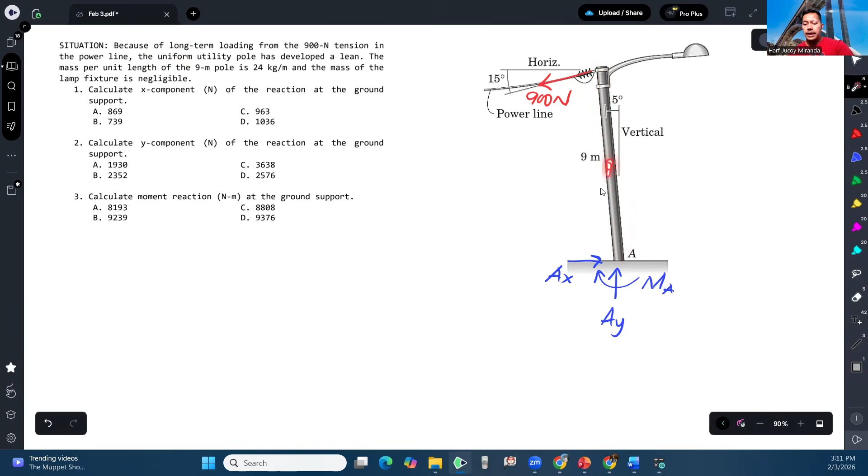Uniform naman. So that means the location of the weight or the mass is at the center, at its centroid. So let's say this is the center - so the weight of the pole acts there.

So how do we compute the weight of the pole? What was given to us is 24 kilogram per meter. So if this is the pole, what was given is the uniform weight per unit length. So this is 24 kilogram per meter. To get the weight of the pole, we just get the area of this.

And what is that area? The area is just base times height. The base is the 9, and the height is the 24. So 24 times 9, and that gives us - this is in kilogram still, since that's just mass - 24 times 9 equals 216 kilogram.

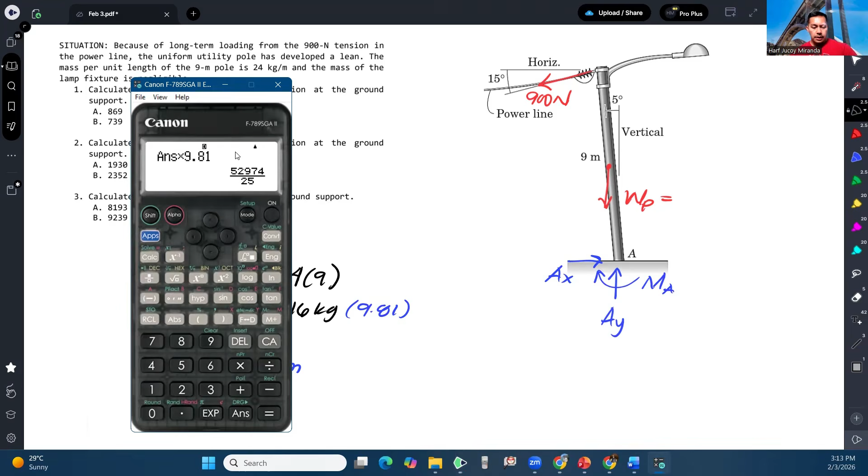But what we want is for this to be in Newton, so to convert it to Newton, we multiply by the acceleration due to gravity. Therefore, the weight of the pole would be 2118.96 Newton.

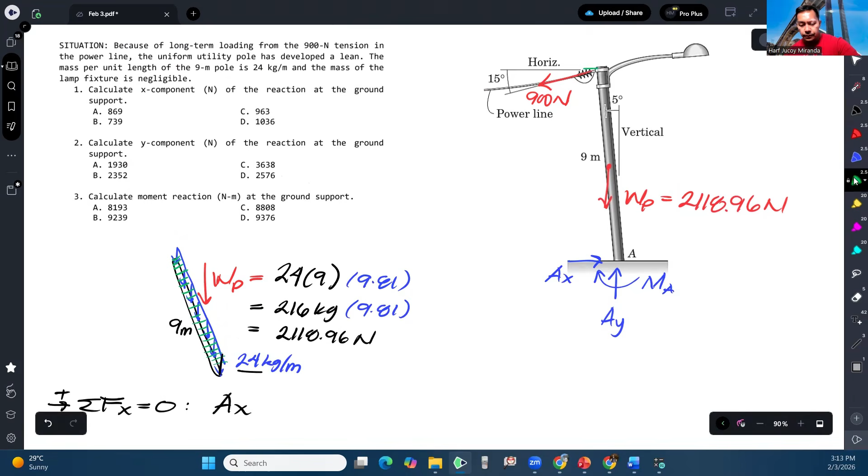Now, to find the x component, we will take summation of forces in x, assuming to the right is positive. So we have Ax. What other x components are there? The x component of the tension force.

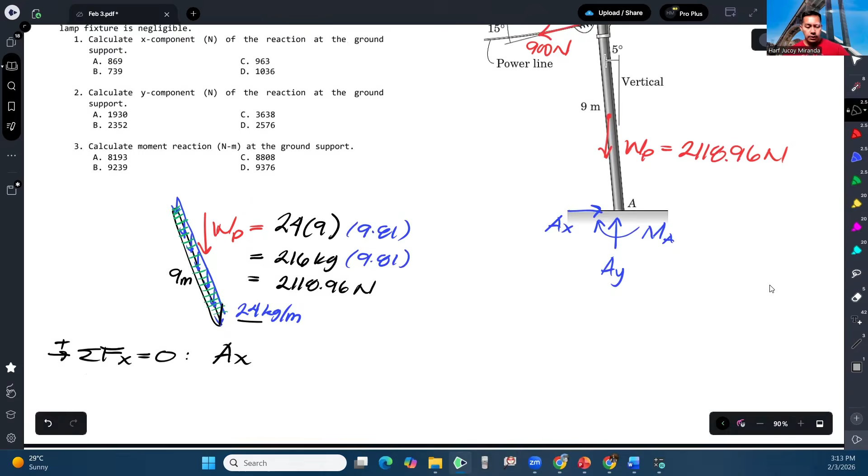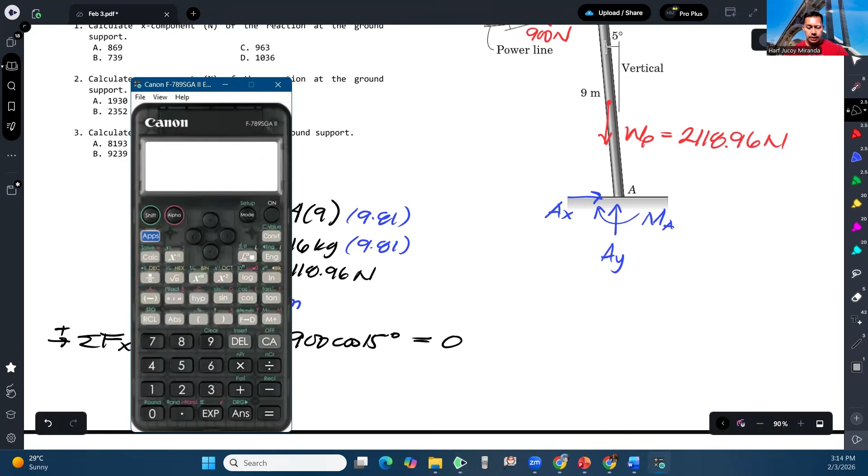So what is the x component of that? Since there's 15 degrees there, that is 900 cosine of 15, because the adjacent side is the x component, so that is 900 cosine of 15 to the left. Aside from that, wala na. So therefore we can already calculate the x component: 869.33 newtons. And that is already our answer for the first question, letter A.

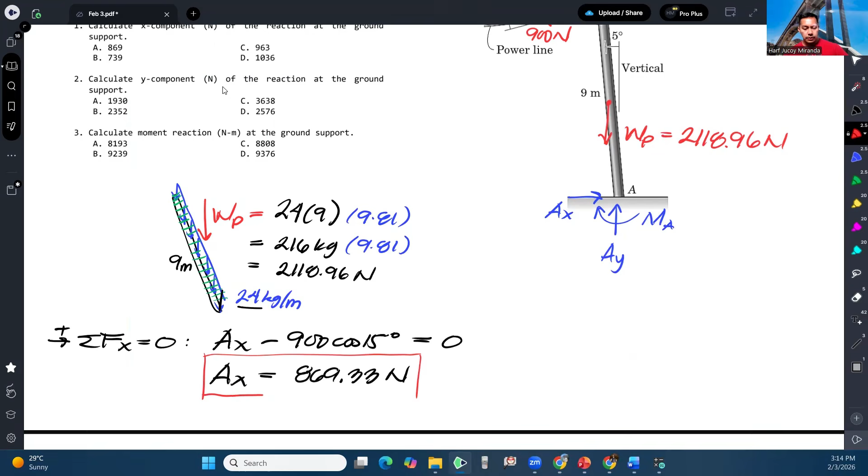Next, calculate the y component of the reaction at the ground. So what we're looking for now is Ay. Let's take summation of forces in y. The forces along y are this, plus the y component of the tension, which is 900 sine 15.

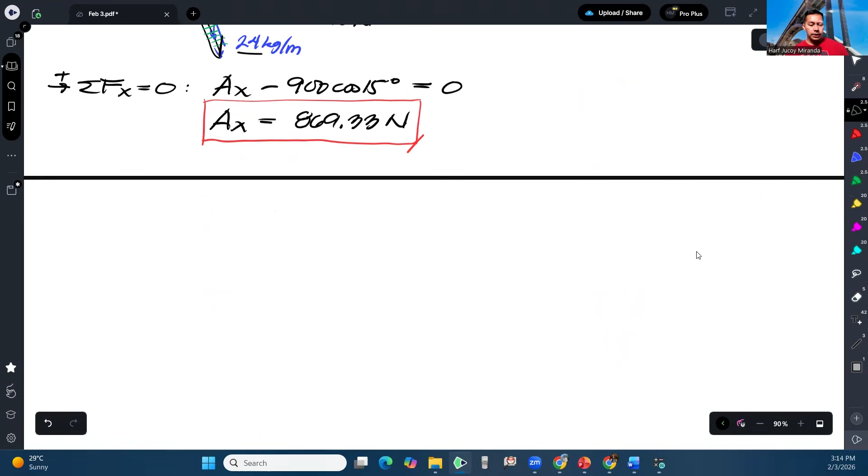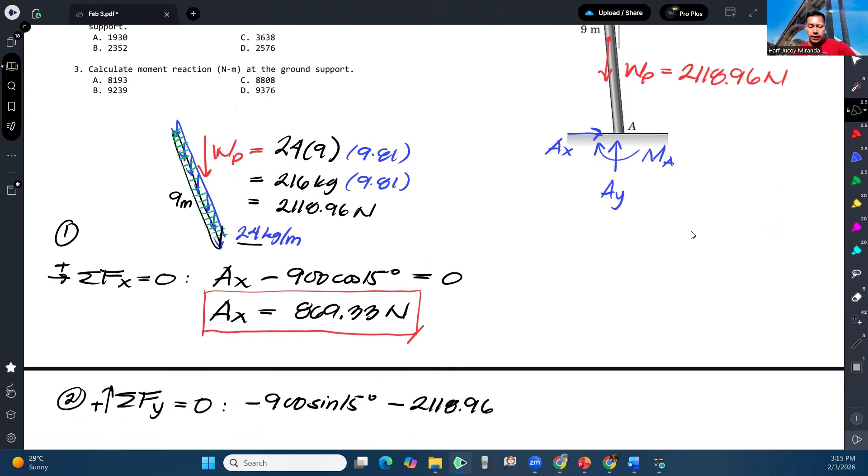Summation of forces y equal to 0, assuming upward is positive. So we have downward, the 900 sine 15, and also downward, this 2118.96, and upward the Ay, equal to 0. So therefore our Ay is 2351.9.

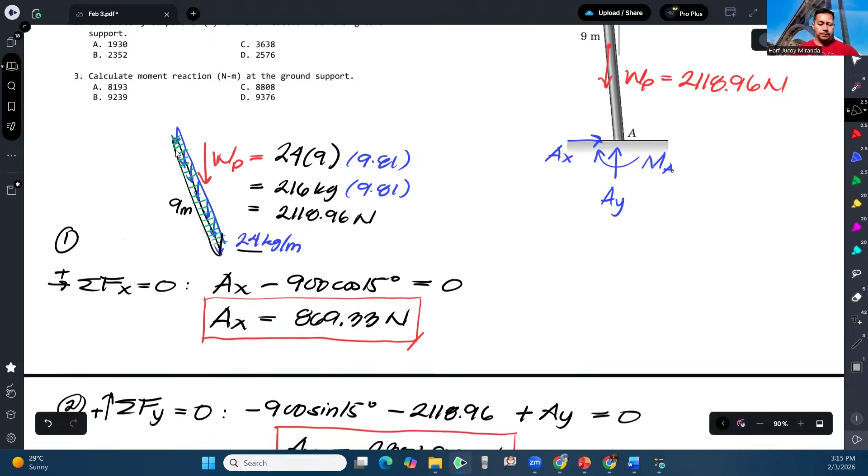So that will be our answer for number 2. Okay, approximately letter B. Lastly, calculate the moment reaction at the ground support.

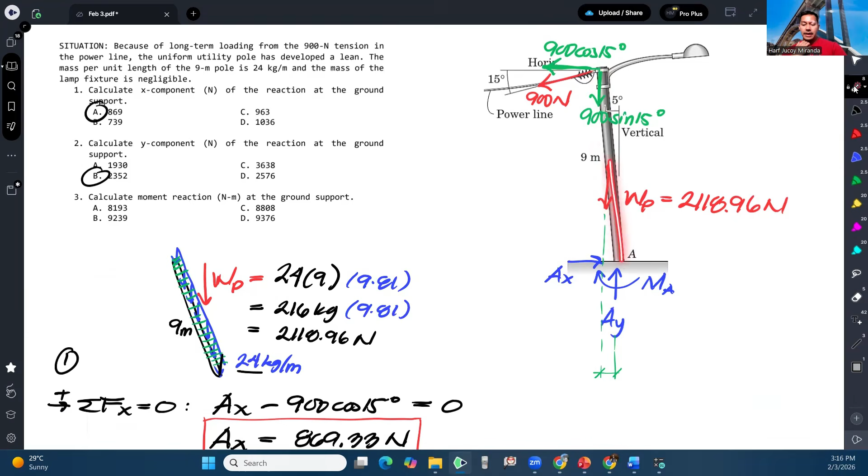We need that. Okay, so what's the distance? Since we know this is at the midpoint, this is half of 9. So this is actually 4.5. Let me just draw a triangle here.

We'll place it here. So that means we know this is 9/2. Okay? And then what else do we need to know?

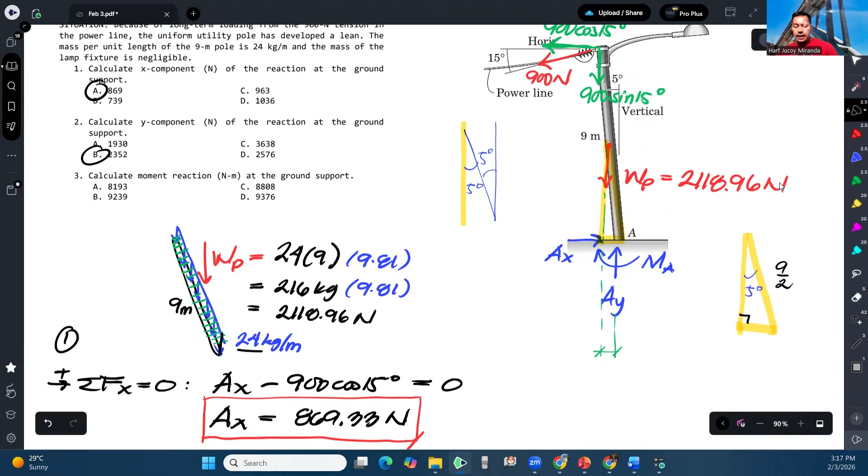And since that's 5 degrees, and this is 90 degrees, we can use the sine function. So sine of 5 degrees, let's call this x, equals x over 9/2. Therefore, x is 9/2 sine 5 degrees. So that's it.

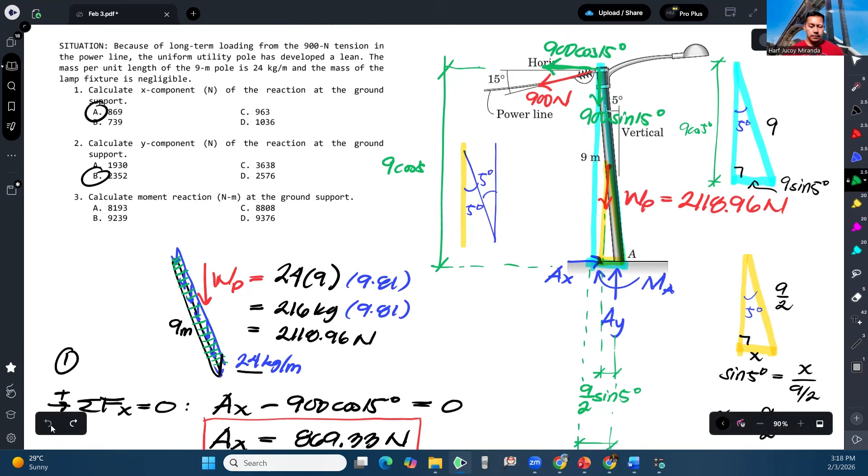Okay, so we are now ready to take summation of moment at A for number 3. Summation of moment at A equals 0, assuming counterclockwise is positive.

Let's start with W sub P, which is 2118.96. The moment arm is 9/2 sine 5 degrees. That's the moment arm. Its rotation is counterclockwise.

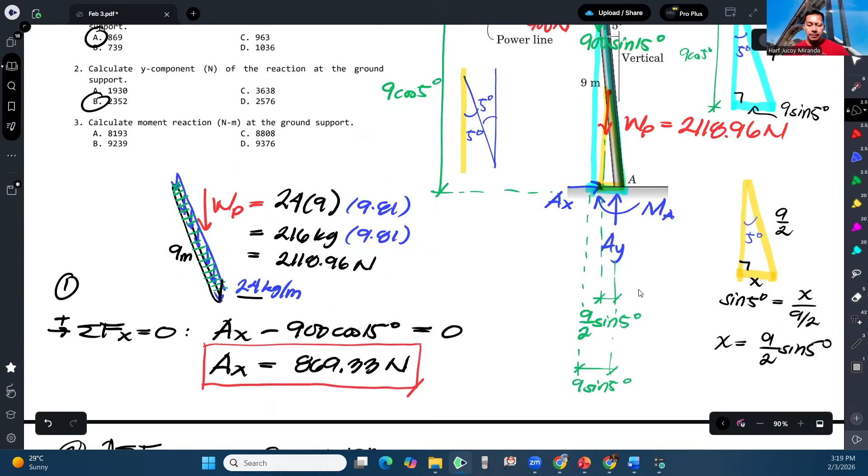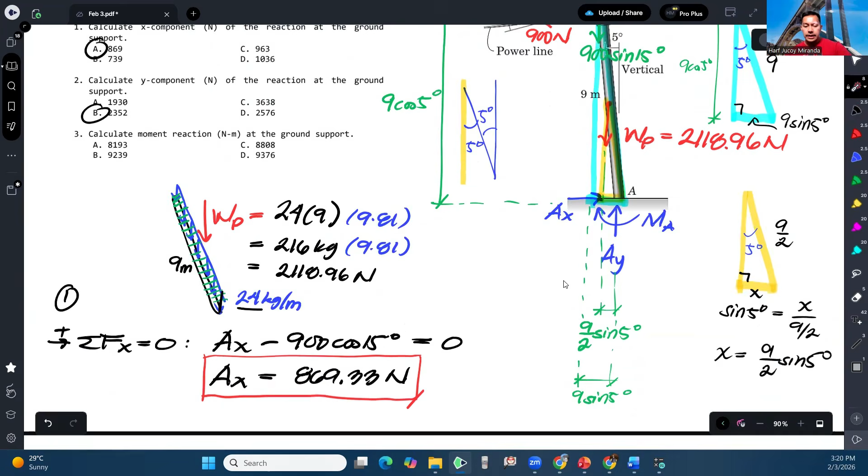Next, the y-component of 900, so 900 sine 15. The moment arm for that is this one, which is 9 sine 5. So the rotation of this would be counterclockwise, so plus.

Okay, and then also this one, horizontal, so 900 cosine 15. The moment arm is this, which is 9 cosine 5. So the rotation it will produce about A is also counterclockwise.

And then lastly, the moment reaction here, MA, which I assumed to be clockwise. All equal to 0. So therefore, the moment at A can now be calculated.

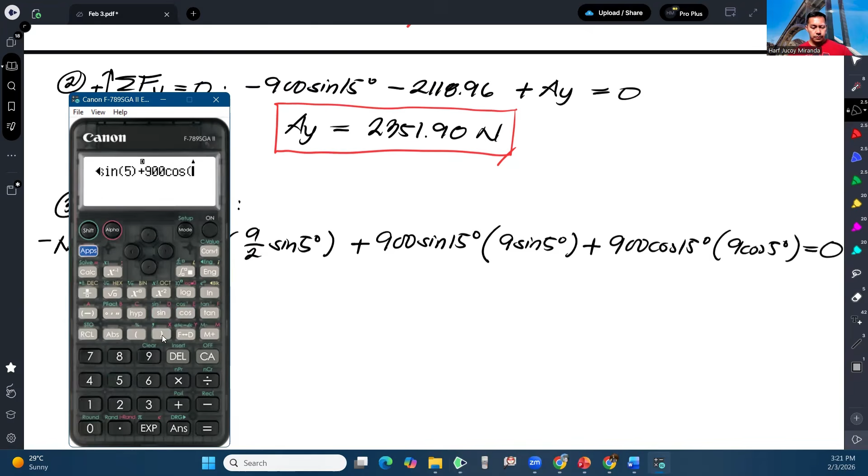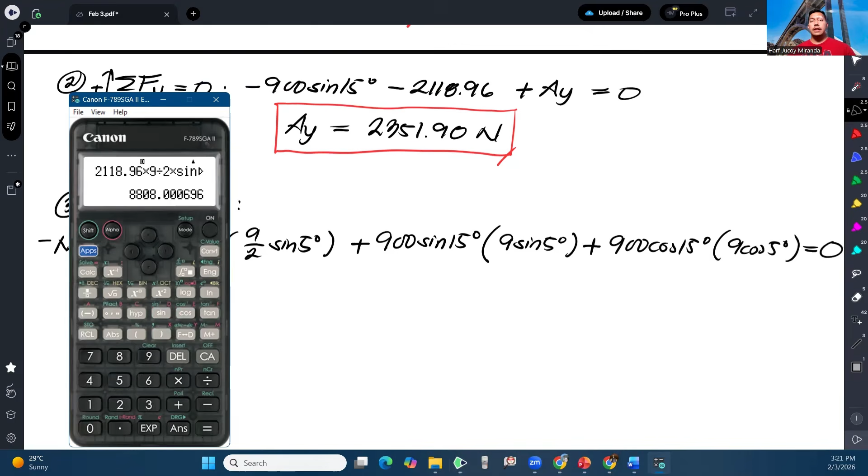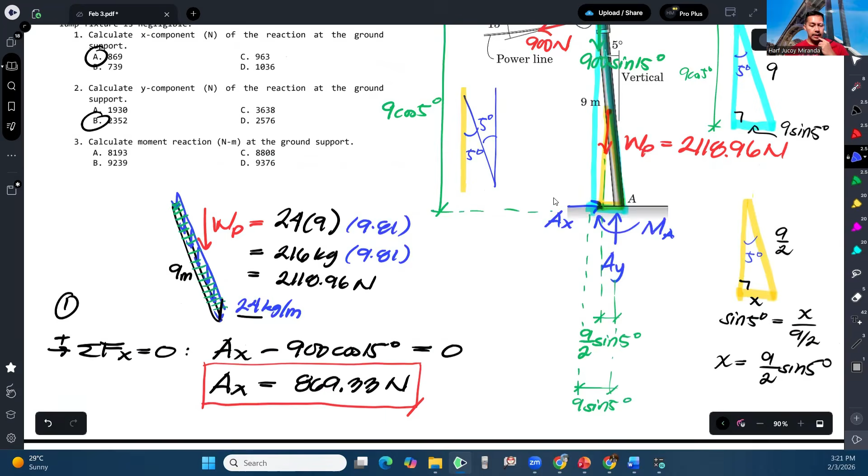Okay, and that gives us 8808.00. But what units is that? This is in meters, this is in newtons, so it's newton-meters. That's what's needed in the problem - it's okay that it's in newton-meters. So that's it.

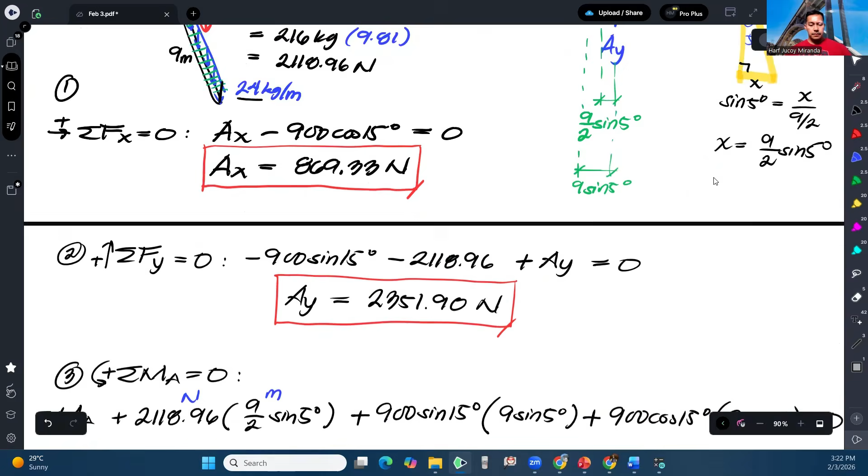Okay, so that is the answer for that letter. And that's how we solve this problem.